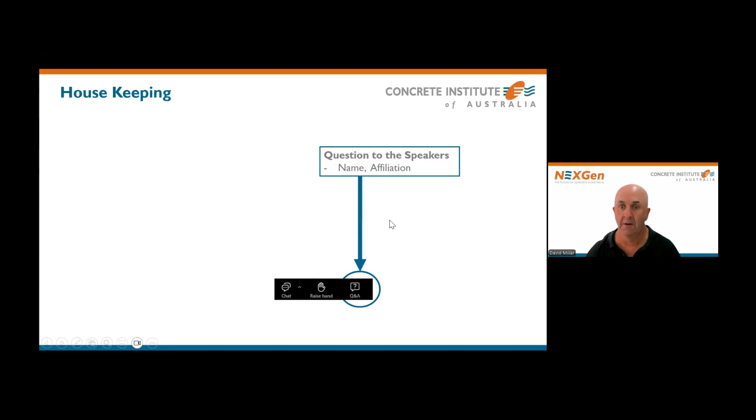Our first speaker today is Shiwei Yu, who is a Senior Materials Engineer at Contour 3D. He earned his PhD in concrete 3D printing from Swinburne University of Technology in November 2022. Since joining Contour 3D, he's contributed to several landmark projects, including the Genesis, which is Australia's first full-scale 3D printed building, the Dubbo Social Housing Duplex, New South Wales's first 3D printed social housing, and the Block 2025 Cabana houses. He's currently developing Contour 3D's proprietary concrete mixes for diverse practical applications with a focus on driving innovation and advancing sustainability in the Australian concrete industry. I'm going to hand over control of my remote to Shiwei and allow him to get into the presentation.

Thanks David for the introduction, and good afternoon, everyone. Thank you for the opportunity to present today. I'm very excited to share what we are doing in Sydney, and the topic of today's presentation is advancing low carbon construction through 3D concrete printing. My name is Shiwei Yu, and I'm a senior material engineer at Contour 3D based in Sydney. Okay, let's start it.

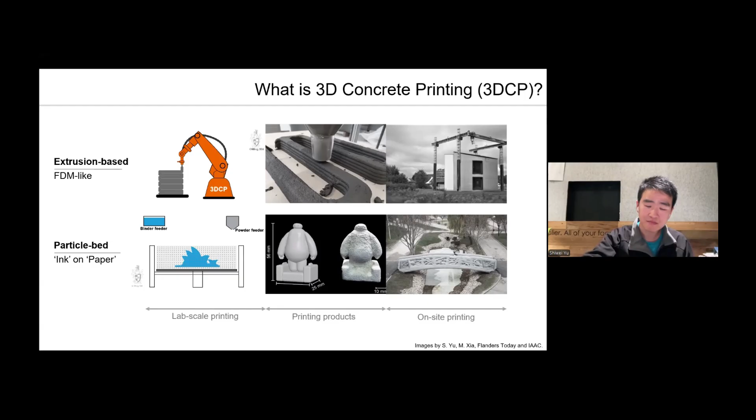The second method is the particle bed approach. In this process, each layer of particles is spread evenly, and a binder is applied selectively to bind specific areas. Once the printing is done, the bound part can be extracted, resulting in a more detailed product. This method has been explored overseas, but it comes with significant limitations in scalability and on-site practicability, making it very difficult to print on-site, though it can be printed in a factory. Today's presentation is mostly about extrusion-based concrete printing.

So concrete printing gives us a smarter option. Instead of wasting materials, we build layer by layer structures using only what's needed. That means less waste, less cost, and a chance to create lighter and more efficient designs. Plus, it lets us bring in recycled materials and low carbon binders much more easily. So in short, 3D printing is not just a new tech, it's really a pathway to low carbon construction.

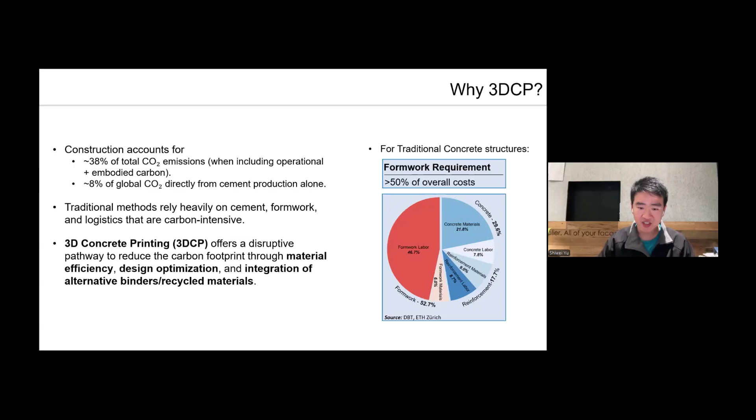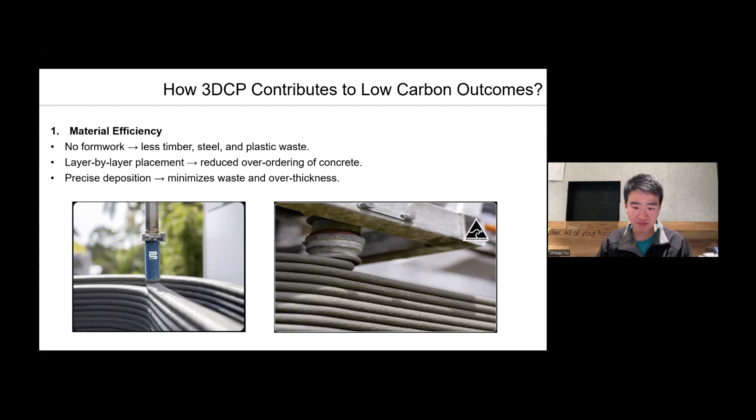When we talk about 3D concrete printing leading to low carbon outcomes, the first biggest factor is material efficiency. Because there's no formwork, we cut down heavily on timber, steel, and plastic waste. With layer by layer placement, we only use the amount of concrete that's actually needed, so no more over-ordering just to be safe. Thanks to precise deposition, the material goes exactly where it should, avoiding unnecessary thickness and reducing waste even further. Altogether, this means less material, less waste, and a much smaller carbon footprint.

Another important contribution of 3D concrete printing is the ability to integrate sustainable materials. In our mixes, we use a range of supplementary cementitious materials like fly ash, slag, calcined clay, and even recycled glass powder. This not only reduces cement demand but also improves pumpability and helps us control the cycling time. On the printing side, we also recycle our own concrete waste, sending it to local crushing stations to produce crusher dust, which we can then reuse in future jobs.

This creates a local circular material loop. We have also tested lightweight aggregates such as expanded glass and recycled sand, which help lower the density of the concrete we use and reduce the embodied carbon dioxide. Finally, we use fibers to control shrinkage and improve tensile strength. What's interesting is that because of the extrusion process, the fibers tend to align with the printing path, which can actually improve performance compared to traditional cast concrete.

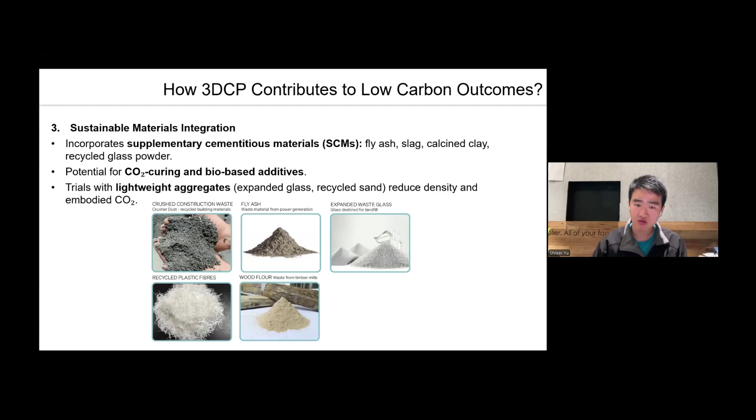Let me share a little bit about the sustainable material we are developing at Contour 3D.

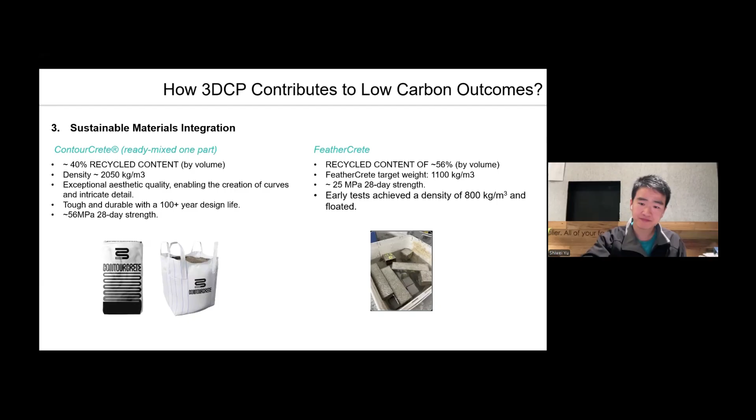Now let's look at the typical workflow for 3D concrete printing projects. It all begins with the architect and the structural engineer who create a CAD file for the design. The file is then imported into a 3D modeling software, which generates a tool path. From there, the file is transferred to a 3D printer, which translates it into machine language, usually something like G-code. At this stage, we can adjust the printing speed, pumping speed, and everything.

From a material perspective, we still use the same raw ingredients as traditional cast concrete. But of course, reinforcement is essential as well, just like conventional construction, because concrete on its own is very brittle and it's very hard to control the quality. By combining this digital and material process, we are able to print complex shapes directly without the extra cost of formwork, opening the door to design more smartly.

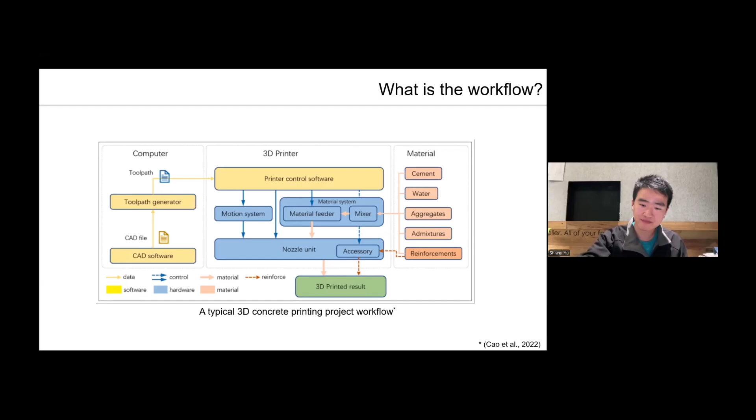When we look at the material for 3D concrete printing, what type of properties are we looking for? The first one is the fresh state during the print. The first property is pumpability: the mix needs to flow easily through the hose and pump without segregation, bleeding, or causing excessive wear.

This can vary depending on the project. For example, in the factory we might only use a 10-meter hose, but on large scale construction sites, the hose length can be up to 100 meters. So the material has to be adapted to these different pumping conditions.

The second property is extrudability. The material must pass consistently through the nozzle and form a stable filament without tearing or clogging.

And the third is buildability. Each printed layer has to be strong enough to support the weight of the layer above it. This part is interesting because on bigger projects, the lag time between each layer can be very long, up to 20 minutes. By then, the first layer has already gained some strength to support the upper layer. So for bigger projects, it may actually be easier to control buildability, because we have more lag time.

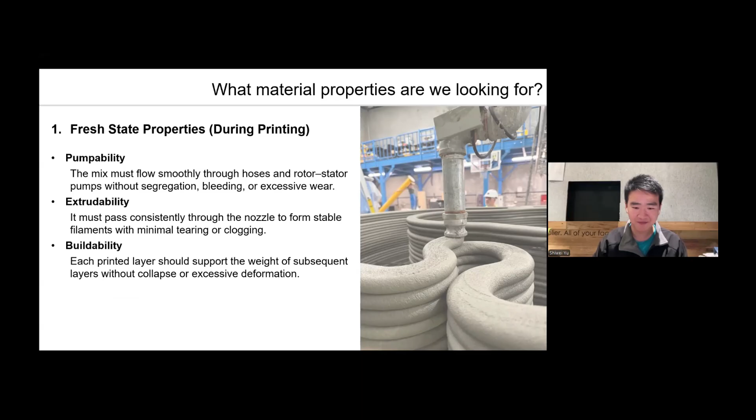The next one is open time, which is also the printability window. The material needs to stay workable long enough for us to complete the printing, but then stiffen quickly so the structure can hold its shape. In practice, the time the material spends in the hose can range from 1 minute to 10 minutes. That's why open time has to be carefully adjusted for different projects. If you use a fast-setting mix in a long hose, you can easily end up with a blockage.

The next property is thixotropy, or yield stress recovery. After the mix is sheared during the pumping process, it should quickly regain stiffness to support the next layers. There's been a lot of academic research into this, but for large-scale construction printing, the effect is actually not that significant.

That's because the lag time between layers is usually long enough to gain strength instead of relying on thixotropy. And finally, setting control: we need to manage hydration and early stiffening fast enough to keep the project moving, but not so fast that it leads to cold joints between layers and pumping issues. This depends on many factors - hose length, lag time, ambient temperature, and more.

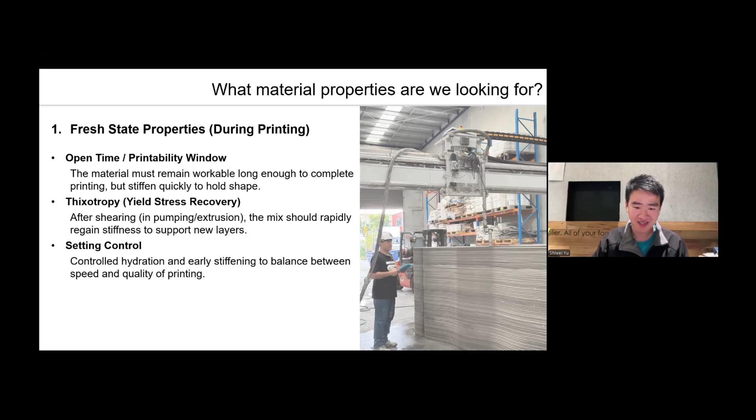The funny part is, if you ask me, can you print a house? I will say yes, it's very easy. But sometimes it's very hard to print a very small column that's very high, because we need to carefully control the setting time for that.

Once the printing is done, the next focus is on the hardened property of the material. The first one is the early age strength. The mix must gain enough strength within a few hours to resist collapse, handling and environmental load.

To put this into perspective, on large projects we might be placing more than 1 ton of concrete every hour. As the structure rises quickly, it also faces significant wind load, so achieving high early strength is very critical for us. The next one is the mechanical strength, just like the conventional concrete: compressive, flexural, and tensile.

Our current material typically reaches 40 to 60 megapascal at 28 days, which is comparable to structural grade concrete. And we also need strong interlayer bond strength, which I mentioned before. Each layer has to adhere well to the one below to avoid a cold joint. This is managed by carefully balancing the setting time and mix design.

And when printing continues the next day, we often use mechanical methods like nails or chemical bond agents to connect the fresh layer with the one we printed the day before.

Then there's shrinkage and cracking. Without proper control, plastic and drying shrinkage can cause deformation or cracks. Because 3D printing mixes generally lack coarse aggregates, shrinkage control is very important for this mix.

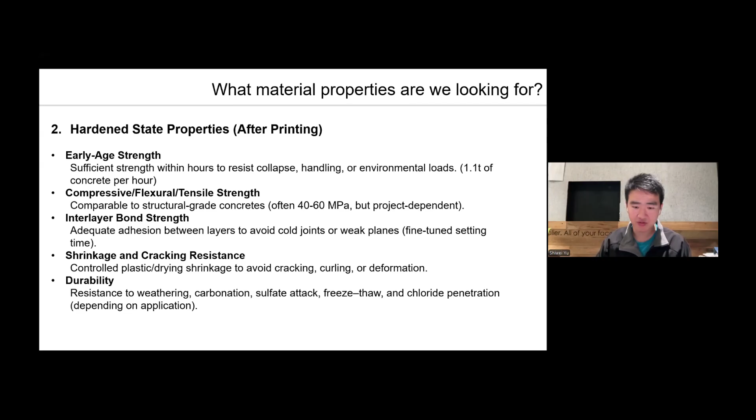One of the key concerns for the material performance is that 3D printed concrete is anisotropic in strength, which means the strength is different from different directions. This result comes from the period when I did my PhD at Swinburne University.

This highlights the importance for architects and structural engineers in the design. They need to be aware of this material behavior and tailor their design accordingly.

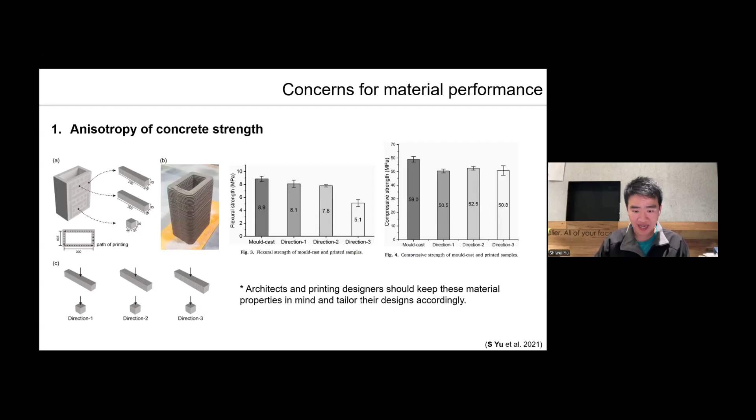To address this, we use defoamers in our mix to reduce the volume of the pores. The good news is that due to the high pumping pressure during extrusion, it actually forces many of the pores out, producing a denser microstructure. In fact, some researchers have even reported higher strength performance because of this effect.

We also observe a distinct difference in void distribution between cast and printed samples. In cast concrete, pores are mostly round in shape, while in printed concrete, pores are often elongated or directional, a result of the pumping in the extrusion process. So this difference in pore distribution is the main contributor to the anisotropy of strength.

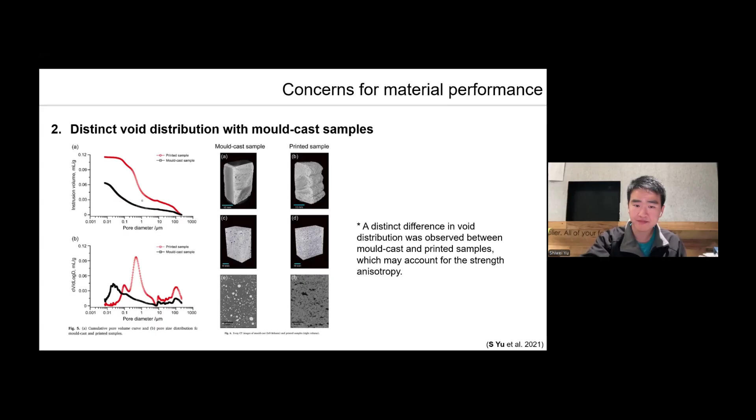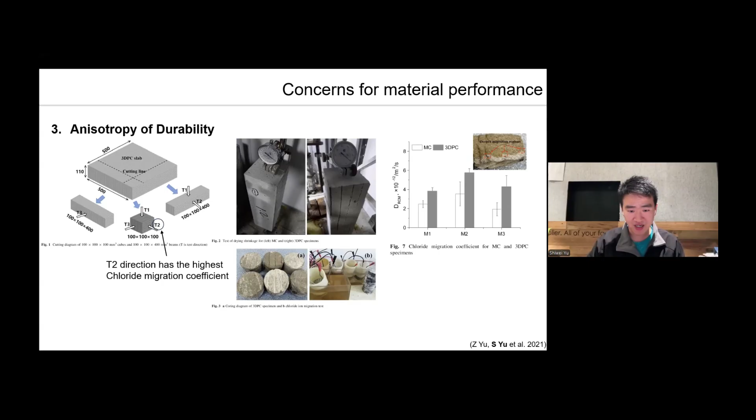The difference once again comes back to the void structure. As I explained earlier, the printed concrete has directional pores due to the pumping and extrusion process, and these make chloride ions migrate more easily in certain directions. So for designers, this adds more complexity to the design. It's not enough to think about mechanical strength alone; durability and anisotropy must be considered during the design stage.

And next, what does it look like on a printing site? It's not totally, but it's a lot of difference from the traditional construction site. Now we've gained a lot of experience, and I can show you a little bit from this presentation.

First, there's a machine operator who controls the gantry movement. Our control system is wireless, so the operator can move freely around the site and make real-time adjustments. They monitor the filament quality and adjust the printing speed if needed. At the same time, they can see live data like temperature, pumping pressure, and more.

The most important factor is safety. So everybody on the site has access to the emergency stop, either through a physical button or directly in the app. Sometimes mistakes happen or unexpected events happen, and safety is very important. So everybody can stop the machine right away.

Next, we have a material operator staying near the mixing and pumping unit. This person usually has a background in material science. The system runs continuously mixing with the ready mix material, and the concrete is then pumped into the nozzle from a long distance hose. The key job is to adjust the water dosage depending on the material and the environment. The water demand changes from time to time, but once the operator thinks we need to adjust the water dosage, the change needs to be made.

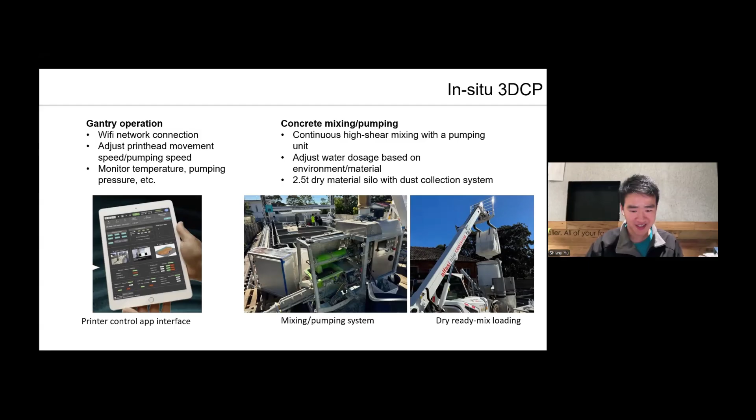We also have a dust collection system for the loading process, because dry material handling is very dusty on site. We care about people's safety and making a green environment on site, so we must have a dust collection system for that.

Here are some of the details we made on site. Firstly, just like traditional concrete, we always need reinforcement. For printed structures, we typically use longitudinal reinforcement along the filament path, as well as cross-sectional reinforcement to tie the wall together and ensure structural integrity.

Next, simple construction details like weep holes and termite prevention are actually much easier with concrete printing. Because the concrete is still in a semi-solid state, we can simply cut it by hand when it's still fresh. So no drilling or complicated formwork is needed.

Of course, things don't always go according to schedule. For example, in this project, the drainage hole collided with our printing path. So on site, our engineers made a quick decision to adjust the tool path and create a new curve to accommodate the change. Since everything is digital and there's no formwork, this kind of modification comes at no extra cost. In this case, it even added a unique architectural feature to the building.

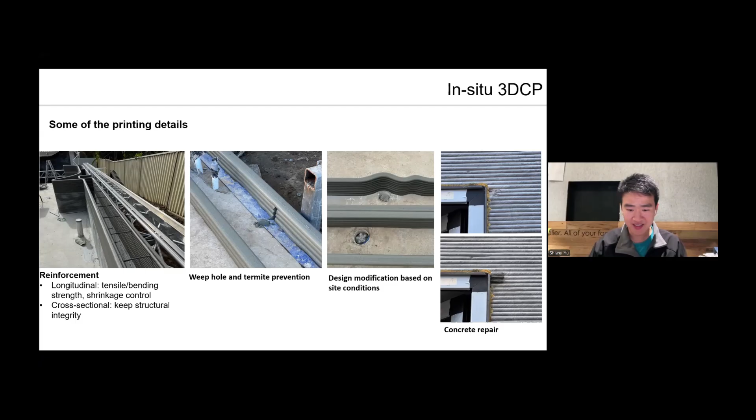Just like conventional concrete, printed concrete is repairable. For example, when we cut out a door frame, one of the corners was damaged. To fix this, we used the same hand mix on site and did a bit of sculptural patching to recreate the filament pattern. We have also developed custom hand tools to make these repairs easy and efficient.

We also developed our own mobile batch plant designed specifically for 3D concrete printing. Up until now, we have mostly relied on ready mix dry material in bulk bags, but this approach limits us because most of the raw material, like sand or crushed dust, arrives in a wet state. So using it in a dry mix is very hard, and drying this material is very carbon intensive.

Now our new batch plant solves this. It has 4 separate silos: one for crushed dust, one for sand, one for cementitious materials, and one for the master batch, which is our additives and fibers in the mix. With this setup, we can adjust the ratio of each silo in real time, giving us more flexibility on site. The heart of the system is a 100-liter pan mixer, which makes batches one at a time.

The most advanced feature here is the high accuracy moisture sensor. Water can be added in 2 stages: about 80% of the water at the start, and then the final adjustment is made slowly with the final water pump. This way, even if the sand or crushed dust has different moisture values, we can still achieve consistent mix quality in every batch.

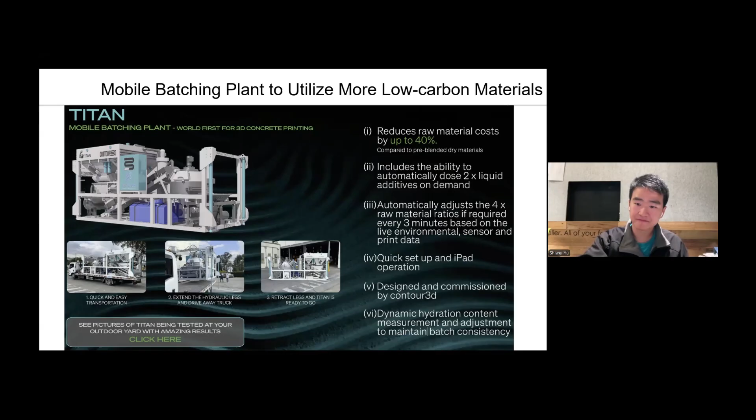Let me show you a case study here: the first full-size 3D printed house in Australia we did. It was printed last year, received its occupation certificate earlier this year, and just sold earlier this month.

This project is a duplex, and we used about 140 tons of dry material to print the ground floor walls. The upper floor is built with traditional timber framing, which integrates seamlessly with our 3D printed structures. If you look closer, you'll see the walls have many complex shapes, the kind that would be extremely difficult and expensive with traditional formwork. But with 3D printing, those changes come with no extra cost.

The walls were designed as a double wall system with insulation poured into the cavity. The house got excellent thermal and acoustic performance, achieving a 7.9 star energy rating.

In terms of cost, construction cost will reduce by around 20 to 30%. Of course, it's hard to make a firm decision now because most of the cost is from R&D and machine development. But looking ahead, if we scale up and print more houses, I'm confident the cost saving will be even greater in the future.

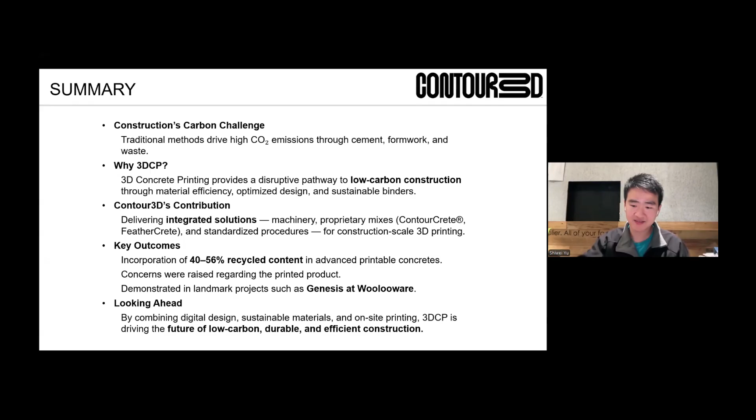That was terrific, Shiwei, thank you. I'm going to take back control of the remote control. So if we do that one, back to me. Excellent stuff, gee, that was a good presentation. Thank you, I was thoroughly engrossed by the work you're doing there at Contour 3D. In particular, the mobile batching plant, I think, is just fantastic. Great innovation. And I can see we've got a couple of questions in the chat room.

I'll start with the first one, Shiwei, if you like. It's from Liam Martin from UTS. Liam asks: a common issue for 3D printing is failure of the bottom layers during printing, attributed to shear stress. Do you agree with this assessment, and how does this relate to the anisotropy of concrete material strength?

Thanks, Liam, for this question, it's a very good one. At the factory, this happens a lot. When we print the next layer, the bottom layer is always the critical part, it's the softest part of the whole print. But when we print on site, the house is very big for one layer, and the lap time for one layer is like 20 minutes. So when we print the first 5 layers, that's already 100 minutes for the first layer. So the buildability of the bottom layer is not that critical in this condition.

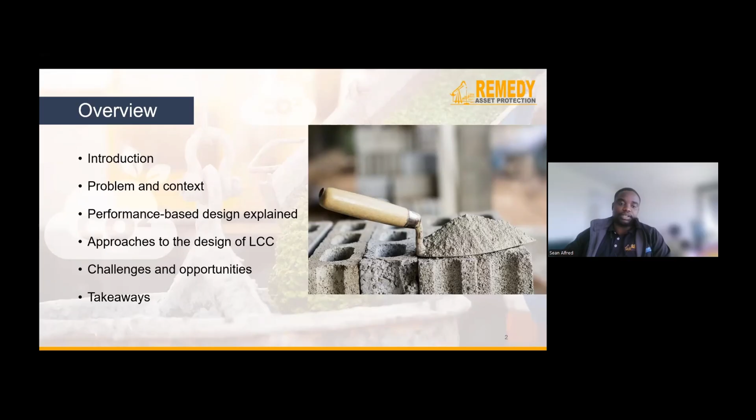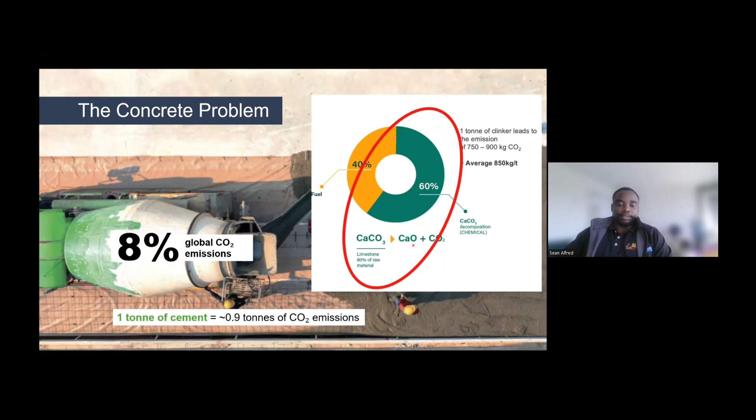By the end of this presentation, about 95,000 tons of cement will be produced, and that will equate to a release of about 85,000 tons of carbon into the atmosphere. The chemical and thermal combustion process involved in the production of cement is a major source of most of the carbon emissions we get from concrete, with 60% being direct emissions from the heating of limestone, which produces the clinker, and 40% coming from the combustion of fuels used in the cement kilns. Concrete production accounts for about 8% of global carbon dioxide emissions.

It is expected that there will be a 23% growth in the consumption of concrete by 2050 in developing economies, while developed nations face a massive need for infrastructure renewals. Now this means that the reduction of global carbon emissions from concrete is an imperative action that we need to take to realize sustainability goals and actually positively impact the environment.

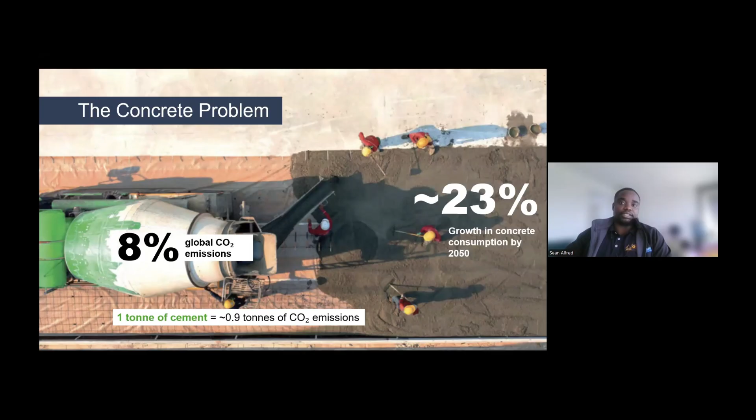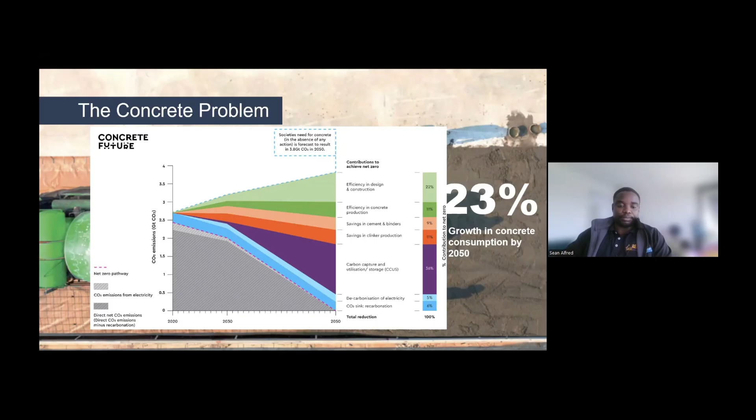So what exactly are we talking about when we say low carbon concrete, and how do we achieve such concrete given the current landscape of concrete production?

We can basically say low carbon concrete is concrete with significantly reduced embodied carbon, which encompasses all emissions of the entire life cycle of the material, compared to, for example, conventional Portland cement concrete. But this isn't just one aspect, it's a family of approaches that all feed into the emissions that come from the material itself.

The primary strategies include cement replacement using supplementary cementitious materials and alternative binders like alkali activated materials or calcium sulfoaluminate systems. With mix optimization, the idea is to reduce cement content through improved particle packing and enhanced performance additives.

Increasingly, we're also seeing carbon utilization technologies that actually capture carbon dioxide and use it within the concrete production as a way of reducing emissions. Within this presentation, I will not delve too much into this last point, but discuss more on the cement replacement and mix optimization approaches.

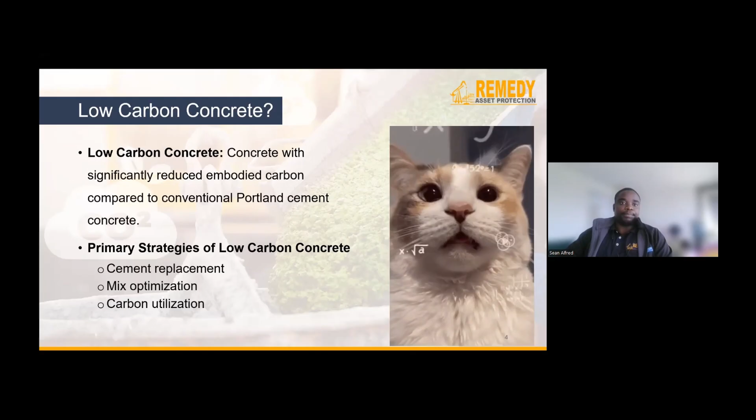So in the context of low carbon concrete, durability essentially is sustainability. And durability matters now more than ever. The more we can extend the service life of the concrete structure, the more we can write off the embodied carbon from the manufacturing, transportation and installation of construction materials over longer periods.

Traditional specifications call for fixed cement content, typically 350 to 450 kilograms per cubic meter, standard water cement ratios between 0.4 and 0.55, and limited SCMs or supplementary cementitious material percentages, usually no more than 30%.

Now, this one-size-fits-all approach usually results in 20 to 40% over-specification in certain instances of cement content, creating limited optimization opportunities. It also presents barriers to innovation in binder systems that can be applied, and often overlooks the actual exposure conditions where the concrete structure will be.

Now, the performance approach uses measurable performance indicators, for example permeability coefficients that quantify transport properties through the concrete, chloride diffusion rates that predict service life, and carbonation resistance that can ensure steel protection, and service life predictions based on actual exposure conditions.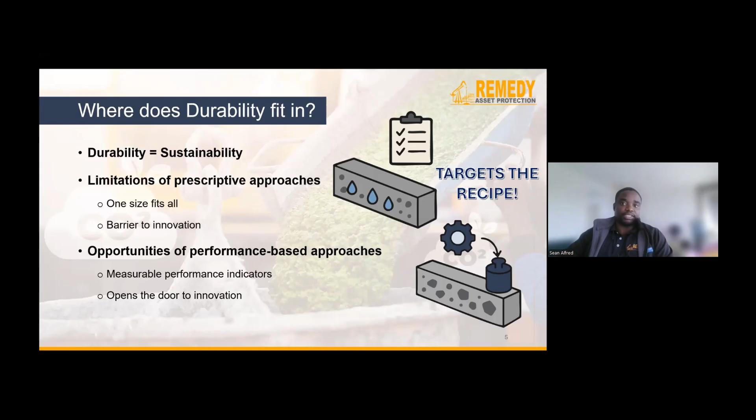In essence, prescriptive design tells us how to build with rigid specifications that restrict alternatives and limit optimization, whilst performance-based approaches tell us what to achieve, with outcome-focused flexibility that encourages innovation and enables extensive optimization opportunities.

Now, durability, as we said, is quite essential, not just to prevent the degradation of the concrete, but to reduce the life cycle emissions. A structure that lasts twice as long requires fewer repairs and fewer replacements and has a lower total carbon footprint.

So the goal here is to actually design concrete that not only performs on day one, but continues to meet functional and structural requirements over decades.

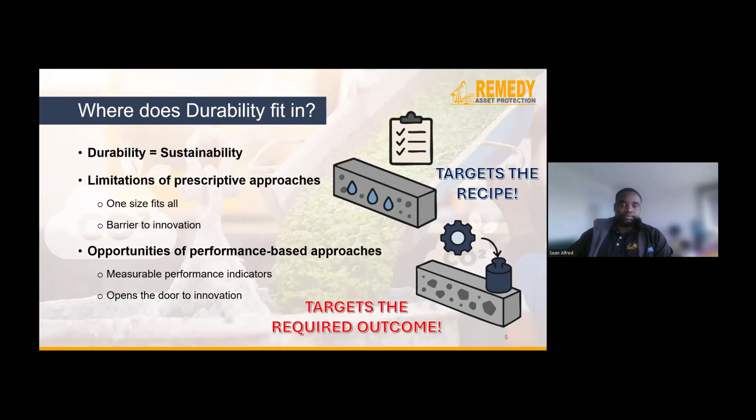In the world of concrete durability, there are performance tests, as I mentioned, the durability indicators, or what we call performance tests, that are employed to assess various characteristics of the concrete with respect to its resistance against deterioration mechanisms. Chief among these are chloride and carbonation-induced deterioration.

Now, tests for permeability, chloride ingress, and carbonation resistance give an indication of the ease with which we can anticipate degradation or deleterious materials penetrating the concrete, which then affects the deterioration, particularly of the reinforcement. You can see here some respective values that I have added that would qualify as acceptable good durability performance.

Indicators with respect to either permeability, diffusion, or carbonation coefficients. The values that we get here from these tests can actually be used as input parameters in service life models to predict what the actual performance over time may be with respect to a specific exposure environment.

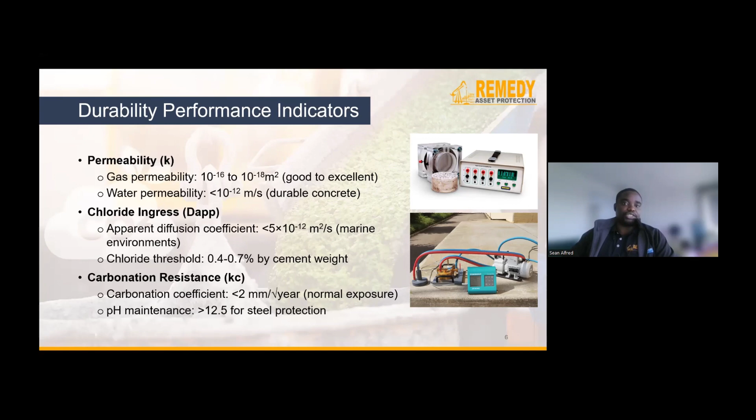And this in turn gives us the confidence to optimize concrete mixtures for both performance and carbon reduction. Now we'll take a look at some alternative binders that offer a way to designing low carbon concrete mixes, which exhibit favorable durability performance characteristics.

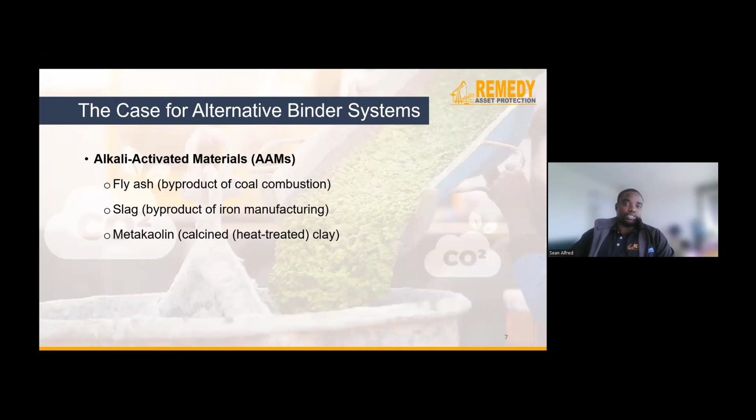Now, beyond just Portland cement or general purpose cement, I'll specifically focus on alkali activated materials, which are a class of inorganic binders produced by reacting an aluminosilicate source material with a highly alkaline solution. The source material is typically an industrial byproduct or natural material rich in non-crystalline or semi-crystalline aluminum and silicon, for example fly ash, ground granulated blast furnace slag, metakaolin, and other materials like rice husk ashes and mine tailings.

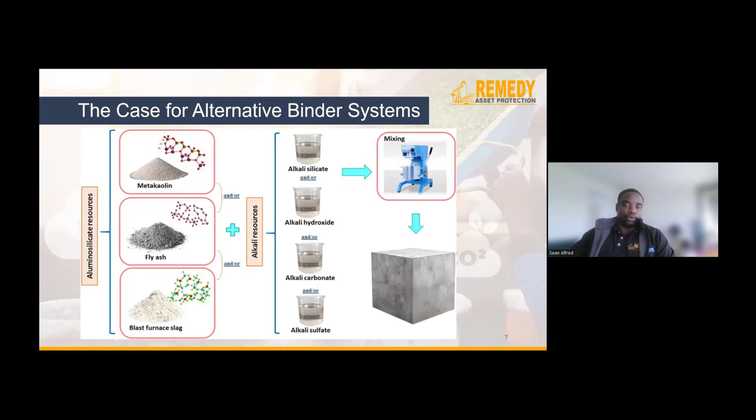Now, the key characteristics that make these AAMs a solution to designing low carbon concrete is actually twofold: the environmental benefits and the durability characteristics. AAMs offer a cleaner replacement for cement-free concrete in that they utilize industrial waste products, translating to up to a 70 or 80% carbon reduction potential.

And you may ask how this is possible. Now to show this, I'm going to use calcined clay LC3 as an example.

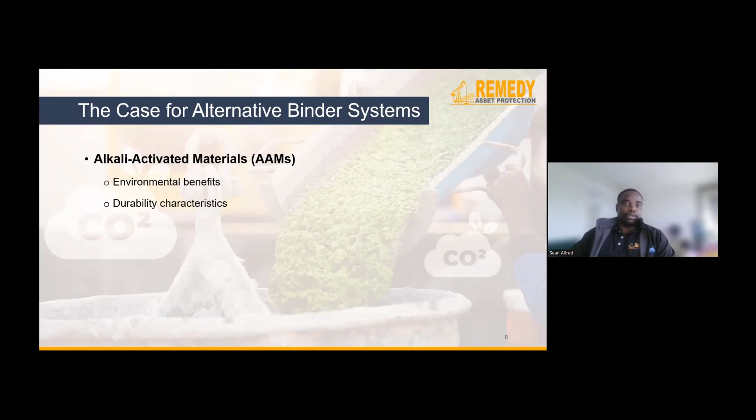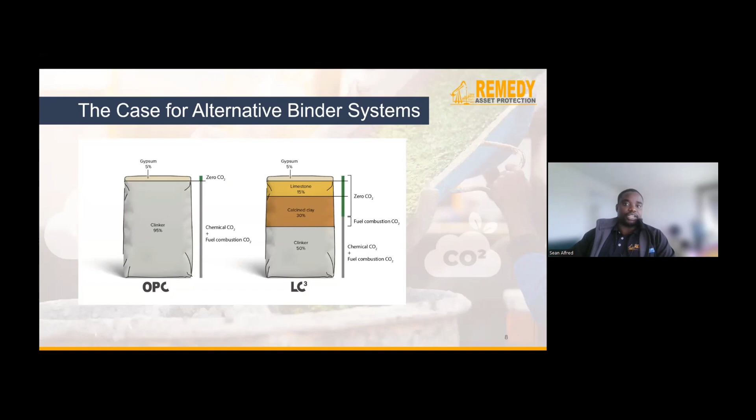LC3 contributes to the reduction of carbon emissions mainly by substituting the energy-intensive clinker content. One innovation is to use 50% of the clinker content from normal OPC with 30% low-grade kaolinite clay, 15% limestone, and 5% gypsum. The lower use of clinker content reduces carbon emissions released during production by up to 40% compared to ordinary Portland cement, because in the production of the calcined clays, they're more malleable and heated at about half the temperature as you would in normal clinker production of ordinary Portland cement.

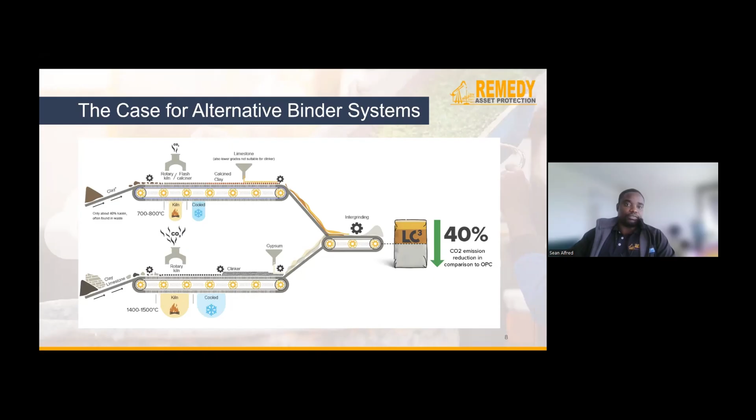In terms of performance characteristics or durability, AAMs possess reduced permeability and increased resistance to aggressive environments. A denser concrete microstructure can be formed from the pore refinement of using these materials, significantly decreasing the permeability of the concrete to penetrative substances like chloride ions, sulfates, and other aggressive chemicals.

As a side note, when you look at calcium sulfoaluminate cement, these derive their strength from the formation of ettringite, needle-like crystal formations, offering a more conservative alternative with performance comparable to OPC systems for permeability, and enhanced chloride resistance due to the ettringite formation and moderate carbonation resistance. So they're not as powerful as the benefits you'd get from AAMs.

Existing research also indicates that these alternative binder systems exhibit high resistance to chloride ion penetration and the characteristics we look for, like using high SCM replacement levels. But to date there's still caution to use high percentage replacement of SCMs because there's limited field data to assess whether observations from accelerated tests are comparable with actual field conditions.

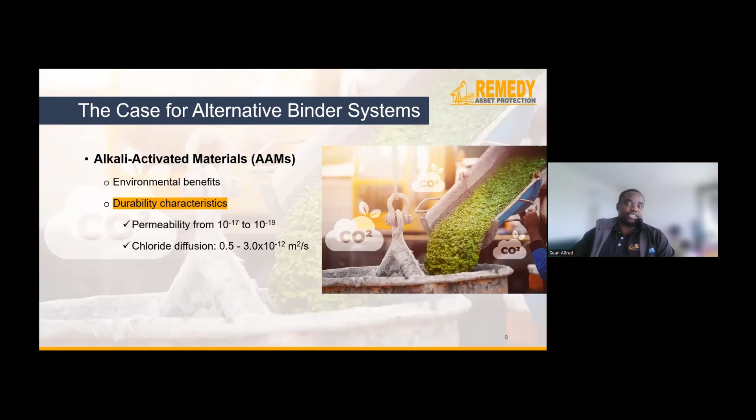If we look at trying to optimize our concrete designs from the mix constituents themselves, optimizing concrete mix design to reduce emissions focuses more on balancing performance with that sustainability aspect. Cement production is the most carbon intensive component within the concrete, and the supplementary cementitious materials we've shown help lower that cement content, thereby cutting carbon emissions.

Using recycled aggregates is also another way, and alternative binders such as geopolymer cement can further reduce the reliance on resource-intensive Portland cement use. Improved water cement ratios and chemical admixtures can help enhance strength and workability, thereby minimizing waste to achieve the mechanical and durability properties needed given a specific environment.

Key to mix design optimization is understanding the exposure conditions the structure will be in service versus the material constituents that can make up a mix that will meet the design service life targets. It's more than just workshopping the black box specifications or prescriptive specifications that we're used to seeing in most standards and prevalent construction practices.

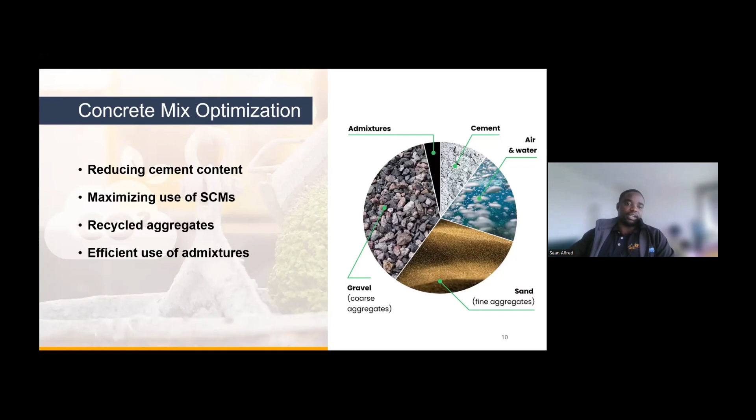What we're also seeing is that advanced modeling and testing can ensure optimal durability performance mixes with reduced carbon impact. I'm going to show you an illustration of how that might look using a 4-stage framework. This might appear as a complex level using data analysis and machine learning.

What you have here in this flow diagram is taken from a study to enhance concrete mix designs for precast concrete segments for a tunnel, done in China. The data is acquired from tests on mechanical properties or durability indicator parameters, which are then processed and optimized using algorithms to model the best solution, in this case the mixed proportions for the concrete design.

The generated algorithm is verified through comparative analysis and microscopic testing of the concrete microstructure. I'm sure you'll agree that to realize the true potential of such an approach or strategy for low carbon mix designs, this requires a lot of rigorous testing and research development.

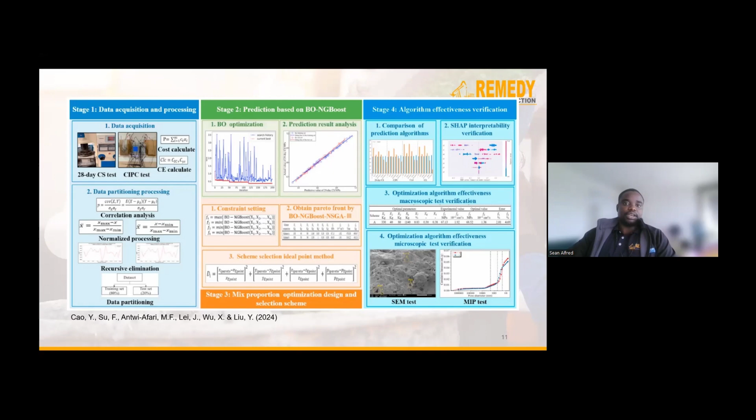This brings us to the next point of our discussion, the challenges and approaches to designing low carbon concrete. I've grouped these into 4 items to specifically discuss this. Durability and performance considerations are critical in evaluating low carbon concrete alternatives, especially in light of increasing environmental concerns and the need for sustainable construction materials. But with any transformative change and wide acceptance of these approaches, the challenges are already there, and there's always some hesitation to adopting these strategies beyond the laboratory environment. I've grouped these into 4 items: material variability or availability, durability mechanisms, knowledge gaps that exist, and regulatory or market hindrances.

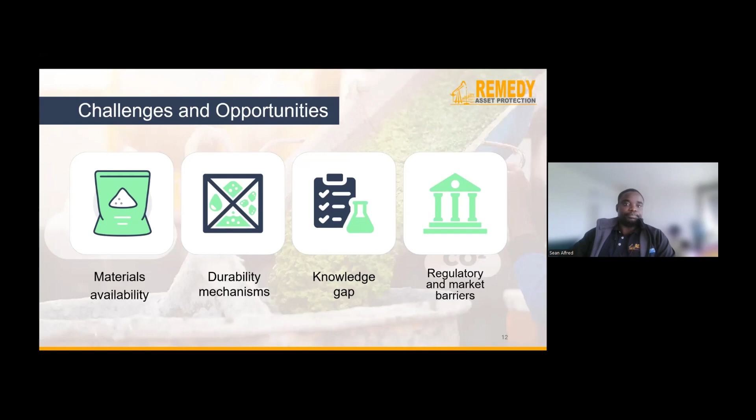Now, if we look at materials availability, currently we have about 300 million tons per year of traditional SCMs available globally—your fly ashes, your slags, those industry byproducts. But to achieve a 50% cement replacement across the industry within normal concrete production, we're going to need about 1.5 billion tons per year. So you can already see the mismatch and the gap between available SCM stocks versus what we actually need if we were to change the way we design our concrete across the board.

Further substitution and replacement depend on locally available materials. For example, in Europe there's limited availability of fly ash and slag, and there's already a push toward alternative systems incorporating limestone and metakaolin. Here in Australia, we have limestone, slag, and fly ash, which are prevalent SCMs used within industry. In the near future, we expect coal to be phased out, so the supply of fly ash, as well as slag from steel production, these availabilities might change over time. So we start to see that natural pozzolans are underutilized, and calcined clays have tremendous potential to meet the needs of the changes in the way we design concrete. Of course, the solution will look different in different parts of the world based on regional material availability.

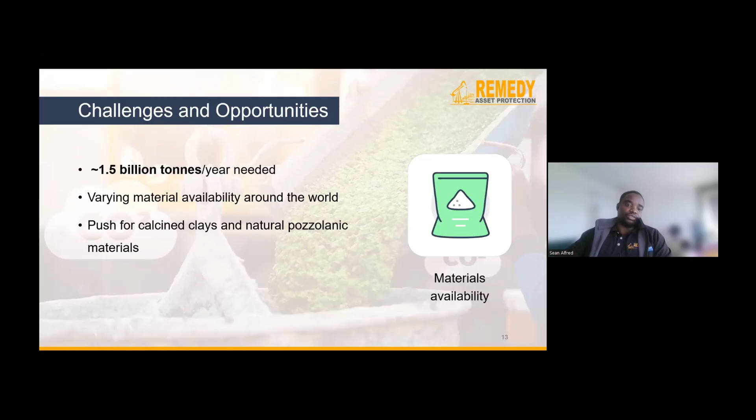If we look at the aspect of durability mechanisms, studies have shown that SCMs like fly ash and slag can enhance durability performance, but this enhancement relies a lot on the proportions used and the specific environmental conditions. What's critical to understand is that the difference in chemistry of these materials means different rules. For example, a higher SCM content can enhance chloride binding, which contributes to corrosion resistance, particularly for high alumina content SCMs like GGBS and metakaolin. But on the other hand, SCMs like fly ash and silica fume don't necessarily have as high alumina content, but improve the pore structure of the concrete, thereby reducing permeability.

The challenge is some of these SCMs have low pH, which translates to higher carbonation rates compared to OPC, but then the pore refinement reduces transportation rates. In this case, considerations can be made of using surface treatments, which may add value to the durability performance of these materials if we do decide to use them. So we can say that different durability indicator methods are required to gain better understanding of the durability characteristics from using different mixed proportions of SCMs in concrete mix designs tied to a specific environmental or exposure condition.

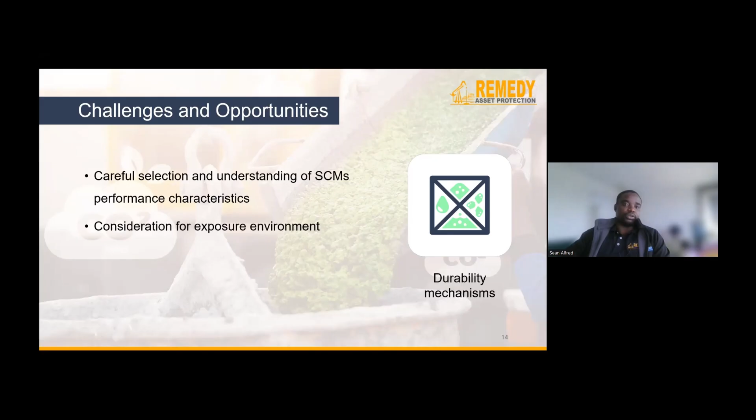Now, if you look at the knowledge gap, a lot of gaps exist in understanding the performance of most of these alternative binder systems, particularly the lack of real world exposure data. Most research and analysis relies a lot on accelerated tests, which limit the correlation with actual long-term field performance. There's still room for development of service life models calibrated for alternative binder systems, and these limitations necessitate rigorous testing and analysis for probabilistic data for alternative binder systems to be able to scale to wider acceptance of these carbon reduction strategies in concrete design.

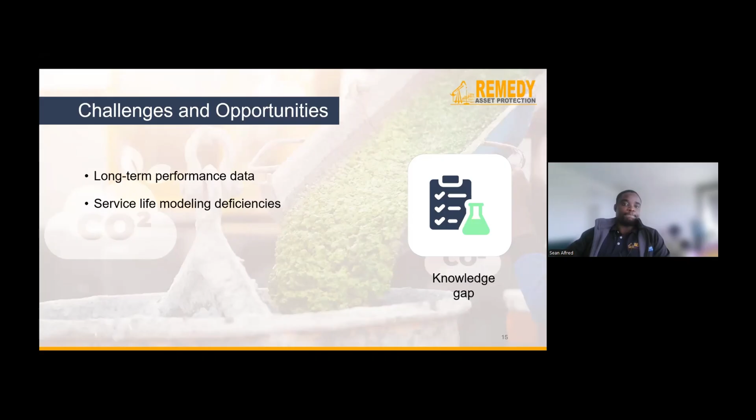If we then look at the regulatory and market barriers, what we see is that adoption of performance-based approaches in concrete design is currently fragmented. Why I say that is if we look at our existing Australian standards and local codes, we see that most of the use of alternative binder systems like SCMs is usually left to a decision that's up to the specifier or the asset owner, for example in aggressive environments. State guidelines and durability series, which exist here, allow durability indicator tests to be specified for durability assessments.

I can give an example of maybe Transport New South Wales or even Vic Roads, which specify durability tests as a way to assure the quality of the concrete to meet the exposure needs and the service life. And this shows a positive step towards performance-based concrete design.

However, full adoption is yet to be implemented, and for wider acceptance, you would expect that at some point the standards we see from, for example, AS3600 and AS5100, need a pioneering movement to update these designs to accommodate such strategies.

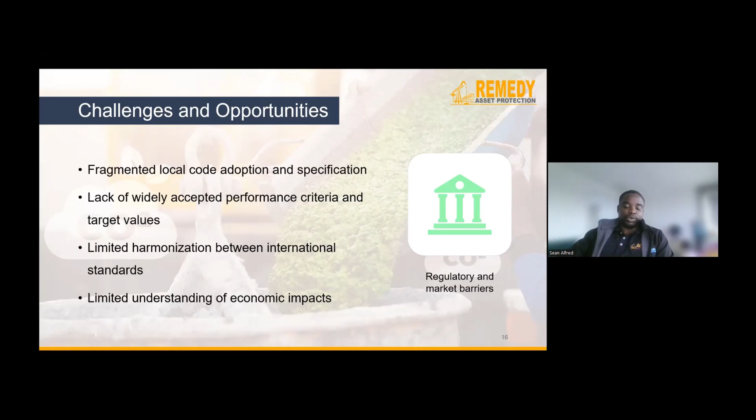And to close off, prescriptive specifications limit our ability to innovate and reduce the carbon impact that comes from our concrete designs. Performance-based design approaches actually enable us to use alternative materials effectively, to optimize our mixes and design for longer life with low environmental impact.

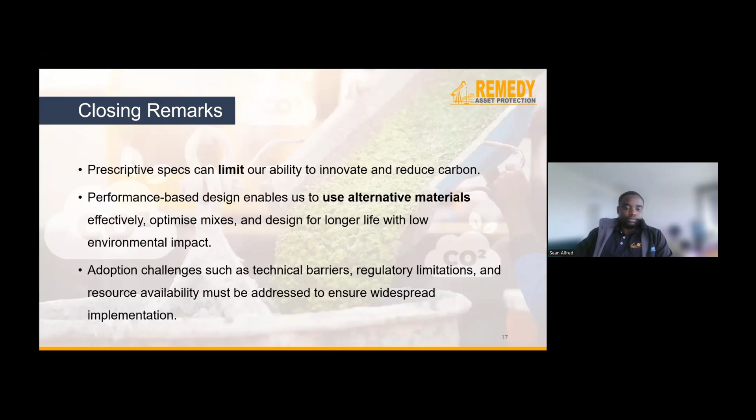And adoption challenges such as the technical barriers we've discussed and regulatory limitations often necessitate more research and development around these materials to gain wider acceptance. I think key to this is understanding that there needs to be increased collaboration between academia and industry to drive this wider acceptance and confidence in using alternative or green concepts within concrete design to meet the durability and environmental needs within the concrete industry.

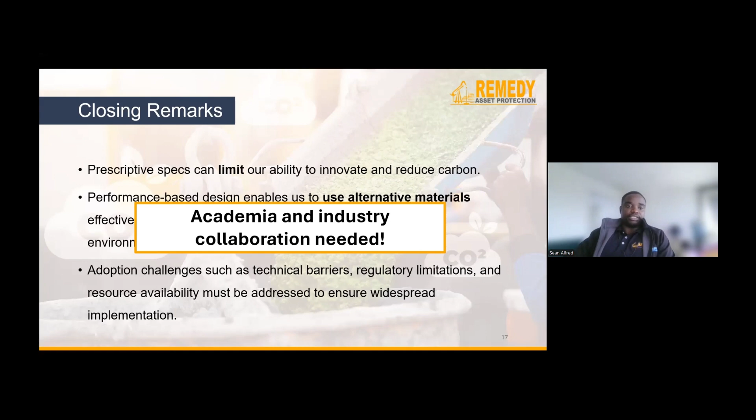That was terrific, Sean. Thank you very much. I could not agree more with just about every point you made there, particularly at the end. I, for one, have had lots of discussions over the years about prescription-based specification versus performance-based specification, and it's terrific to see our young professionals really honing in on the importance of performance-based requirements, particularly as we are moving into some uncharted territory when it comes to concrete design and specification.

And I couldn't agree more with you on all of those remarks, and also around the barriers. It was a discussion we had in depth at our conference last week in Adelaide. There are a number of barriers, but a lot of them revolve around the adoption of new materials. Why is there resistance to do that? Because there's no real benchmark or standards. Why is there no real benchmark or standards? Because there's a resistance to performance-based specification. So it all sort of revolves around that.